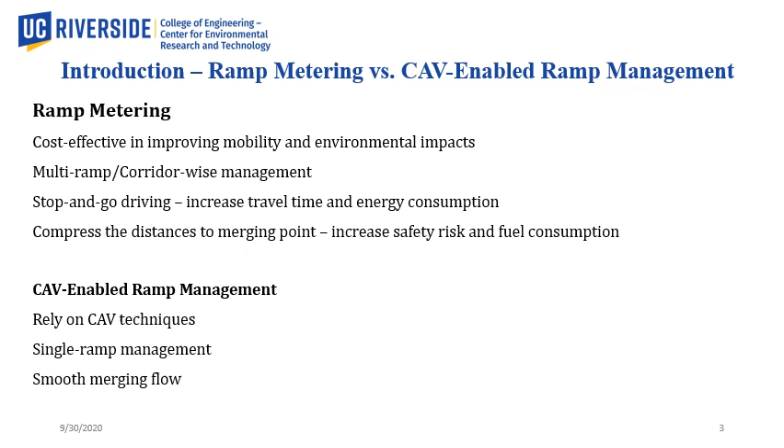However, since ramp metering introduces stop-and-go driving for ramp vehicles, it increases travel time and energy consumption. Also, ramp metering compresses the distances that merging vehicles have to adjust their speed to merge into the mainline stream, potentially increasing the safety risk and fuel consumption. The contributions of our proposed system are related to the following issues of existing work in this research field.

Energy consumption. Utilizing CAV techniques, many researchers have been trying to design a cooperative control system between vehicles in the ramp merging area to improve mobility metrics. However, few of the above approaches take energy consumption as a major focus in the problem formulation.

Entrance sequencing. Although previous research proposed many sophisticated control methods, they failed to fully consider the entrance sequence of both mainline and ramp vehicles into the merging zone. The first come, first served strategy and simplified estimated time of arrival scheme are commonly used.

Inflow regulation. The cooperation of vehicles in the merging area proposed by existing research can only improve the local performance of the system. The unregulated inflow rate of the ramp vehicles can still lead to potential oversaturation of the highway network, thus increasing the risk of upstream congestion and traffic accidents around the merging area.

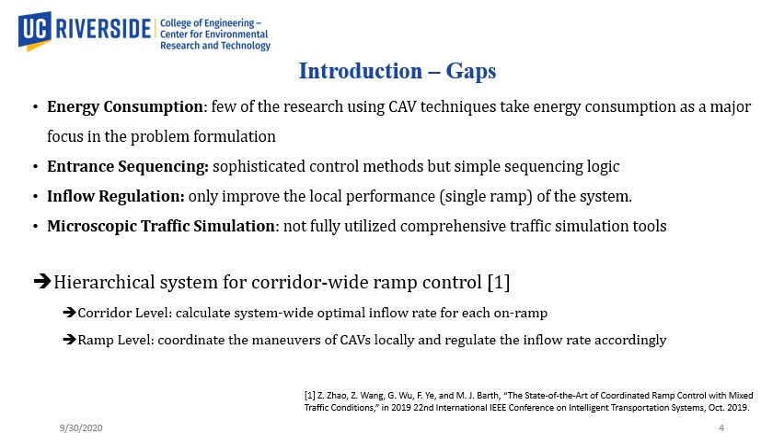In this paper, we focus on the development of the ramp merging control subsystem by assuming the suggested ramp inflow rate to be given as input. The proposed study assumes a second-order dynamic for vehicles. Since we only control the longitudinal dynamic, we set up a one-dimensional coordinate system and map the positions of vehicles on both mainline and ramp to this system.

Using the state and observation of a group of vehicles defined in this slide, the system can be formulated in a linear form. Then we formulate the cooperative merging as an optimization problem in a quadratic form by balancing the tracking error and the control effort.

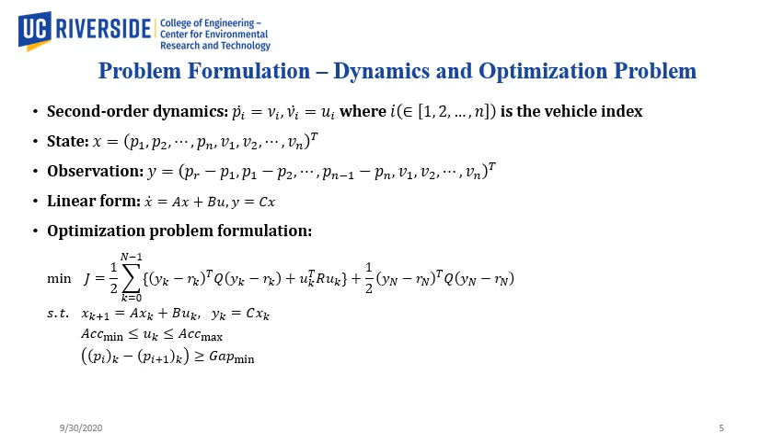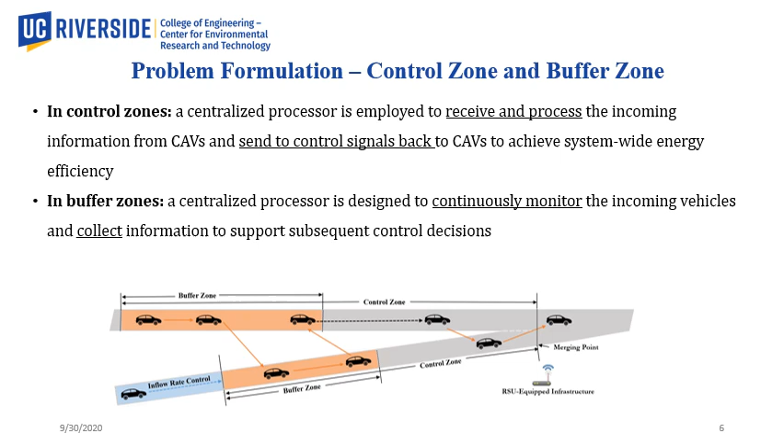Buffer zones, shown in orange, are located on the upstream portion of the control zones and are designed to continuously monitor the incoming vehicles and collect information to support subsequent control decisions. The hierarchical architecture of the proposed ramp management system is shown in this slide.

In the data collection module, vehicles' information is collected once they enter the buffer zones, triggered by an event-based scheme. Because the controller is designed to regulate the vehicles to form a compact string, it is important to know the entrance sequence of the vehicles into the merging zone.

Intuitively, the sequence would have impact on the string-wise energy consumption. Therefore, instead of using a heuristic sequencing protocol, such as first come, first serve, we develop an optimal sequence determination module to identify the most energy efficient sequence. The module can examine all possible sequences, apply the finite horizon linear quadratic tracker to predict the controlled speed profile of each individual vehicle, estimate the associated energy consumption, and select the least energy consumption sequence for the vehicle level control.

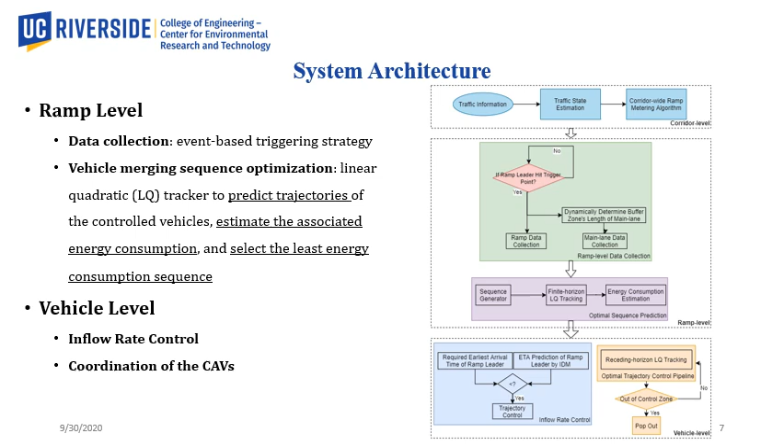For the vehicle level, two types of control are involved. The ramp leading vehicle would be controlled to regulate the ramp inflow rate, and all CAVs in the same group would be controlled together cooperatively. Ramp leader is the first on-ramp vehicle that does not pass through the buffer zone and has not been controlled. A ramp leader can trigger the vehicle grouping process by hitting the trigger point. All the vehicles in the buffer zone will be then controlled as a group.

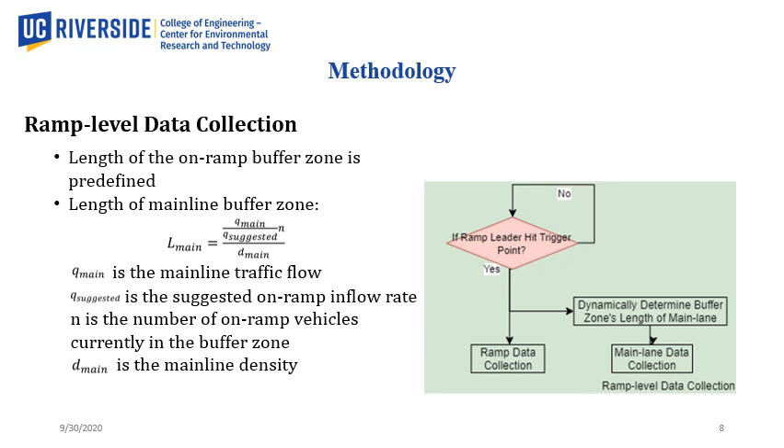The length of the on-ramp buffer zone is predefined, and the length of the mainline buffer zone is adapted to the real-time traffic condition, such that the number of vehicles in both ramp and the mainline can always match. For each group, we will first exhaustively generate all feasible sequences, and the trajectory of each vehicle can be calculated by solving the optimization problem presented in the previous slide.

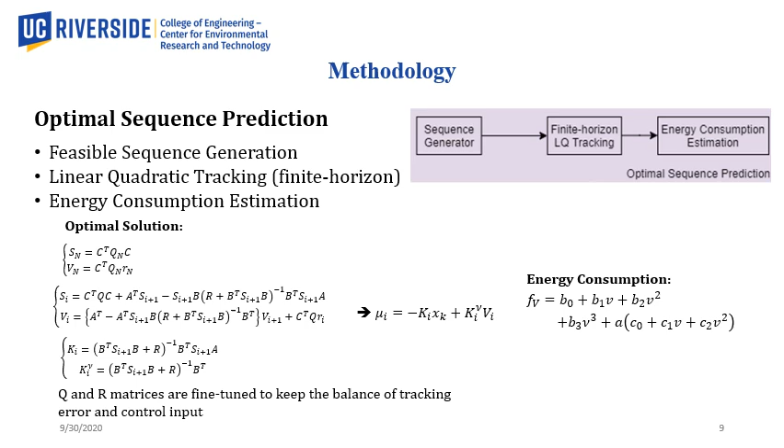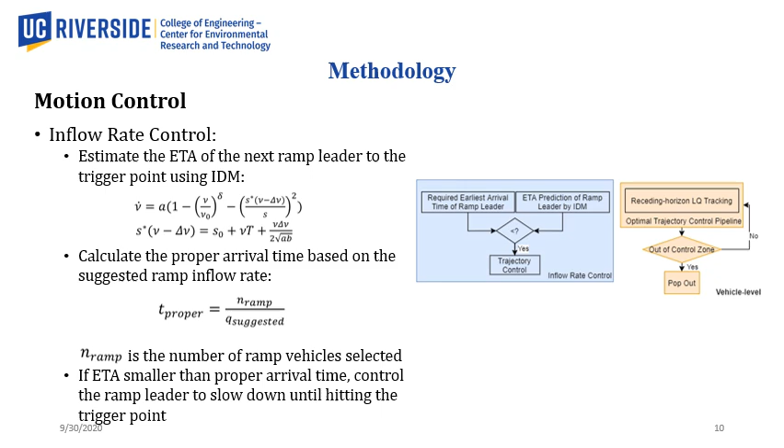Next, two types of speed control are introduced here. When the estimated time of arrival is earlier than the proper arrival time derived from the ramp inflow rate as required from the corridor level, we applied a linear controller to slow down the ramp leader till it hits the trigger point. For coordinating the group of CAVs, we use receding horizon LQ tracker to control each group of the vehicles given the optimal sequence. Here the Q and R parameters are the same as the finite horizon LQ tracker used previously for optimal sequence prediction.

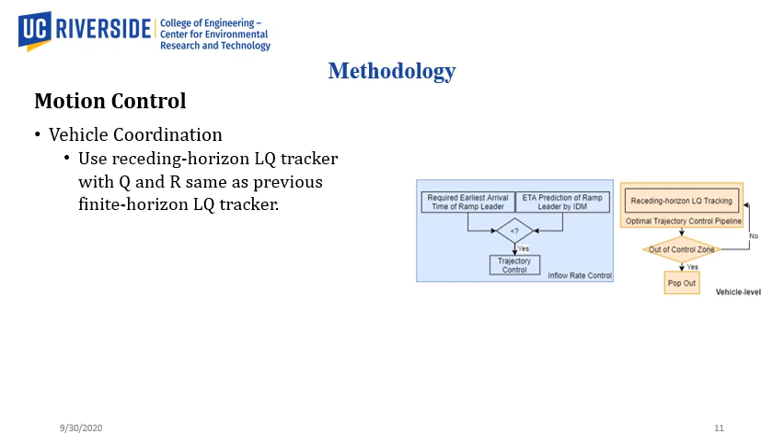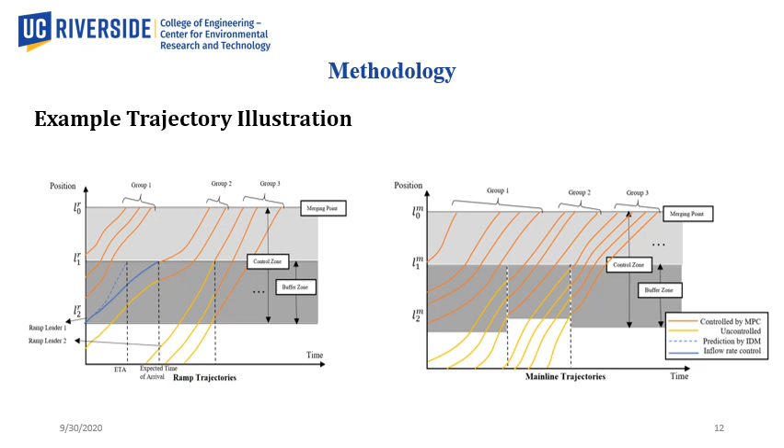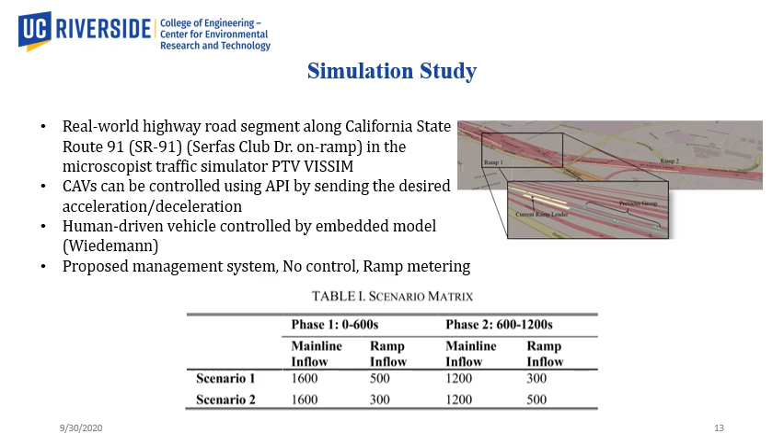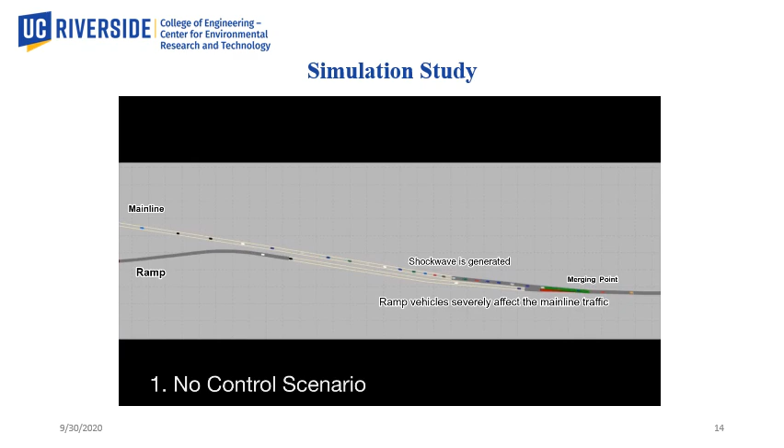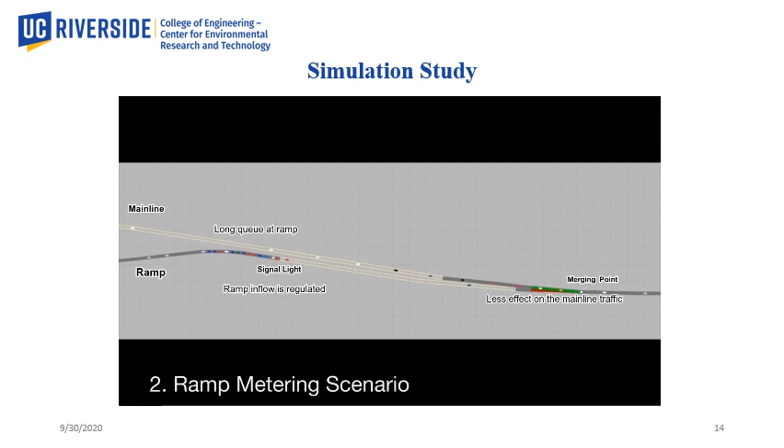In our simulation, the conventional ramp metering system and the ramp without any control approach are introduced for comparison. As shown in this video, in no control scenario, ramp vehicles severely affect the mainline traffic and cause shock waves. For ramp metering scenario, although less effect to the mainline traffic, long queue at ramp is generated because of the stop and go maneuvers. For the proposed system, the system flow is smooth and stable.

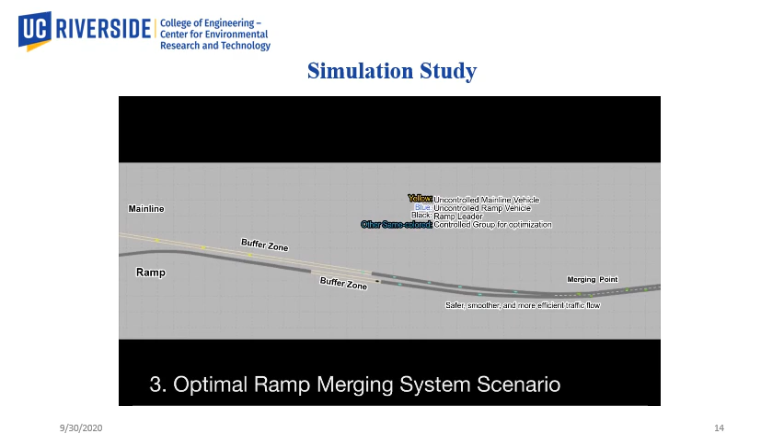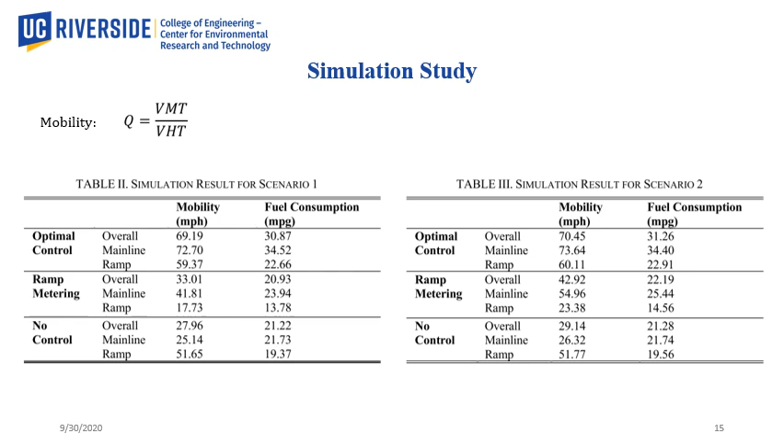An ongoing research direction is to develop the upper-level corridor-wise perimeter control algorithm, which can provide the optimal ramp inflow rate cooperatively for each involved individual ramp along the corridor. In addition, more practical considerations on the mixed traffic scenario would be one of our future steps.